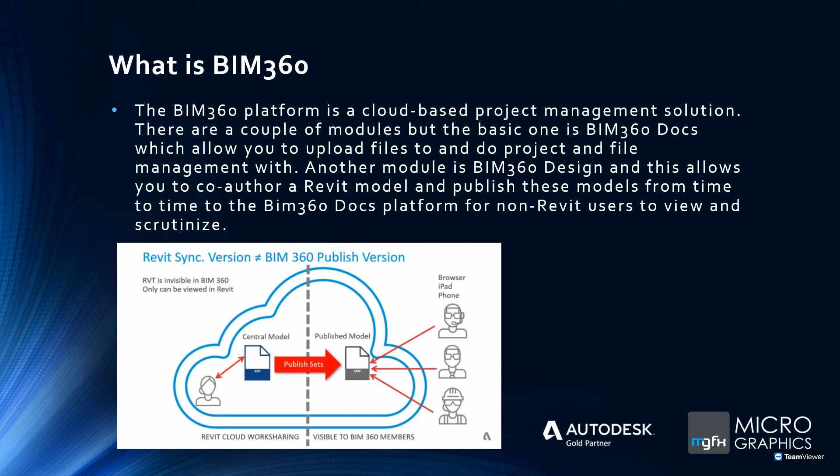And this is where the virtual meeting basically would occur. There are different other modules behind and for BIM360, also construction modules that take this further, but for now I'm just going to focus on those two ideas: the co-authoring of Revit on the left-hand side, which then gets published to the right-hand side for non-Revit users to look at the model.

Okay, so just a little bit on what virtual reality is and the hardware required. We'll talk about the hardware in depth just now, but it's basically a headset or technology that you add to your visuals. You put it on your head, you look through it, and what you see is the model that you've designed in Revit.

If you turn your head, you basically see the inside of the building, and you can use these controllers to teleport to different areas of the model. Some of these apps also have menus, so that when you select various buttons on these controllers, you would access these menus and then do certain things. But the idea behind virtual reality is you are immersively inside the environment.

Now, it could be games, it could be, in this case, the building, and it's a growing and more popular platform to meet and play games and whatever with.

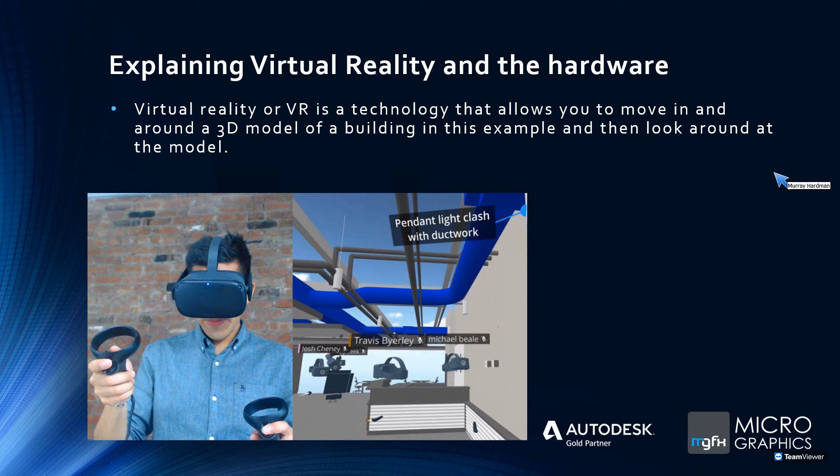So there are many players in this market producing and providing hardware. I think PlayStation has also got a VR headset that you play games with. There's Oculus, as the little picture shows. There's HTC as well, there's Windows headsets and various other headsets, and it's progressed very well in the last couple of years.

The first kind of versions were tethered, as they call it, to a PC, so you needed the PC to do any processing of the visuals that you see, and you were linked to the PC with a cable.

Nowadays, the kind of version 2, or the 2.0, isn't tethered to a PC. It's got its own processors built in, and it's got Wi-Fi, so it links to your routers directly, and you upload and download the apps on the actual headset.

There are obviously various makes, and you can get them from your IT store, even from us. Okay, so that's the equipment that you would require to meet virtually inside this kind of idea.

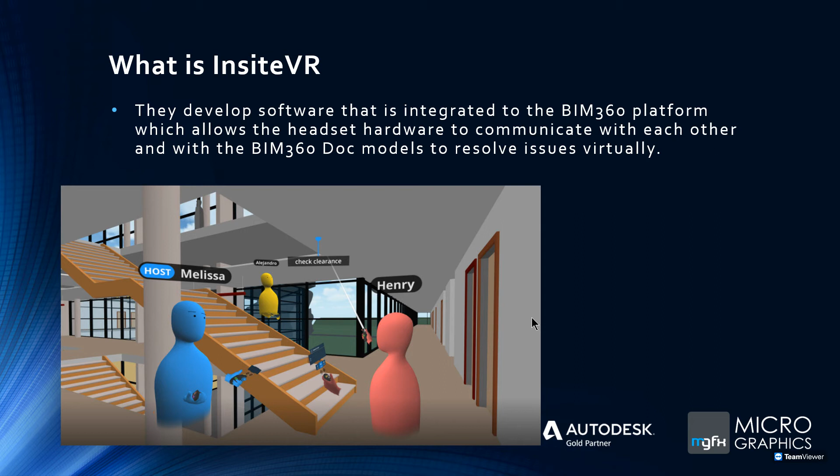If I go to the next slide, you'll see how you get into this particular mode. You'll go to your website, log into your BIM360 platform, see the project, get into the project, and maybe invite other people. Then, once you've installed this Insite plugin integration, you'll see additional buttons on your interface.

It's basically one button that you press, it kicks in the software, you put your headset on, and you're inside that building. Then other people can join too. So it's not a very technical way of getting into this area—it's simply logging into the platform, clicking the VR button provided by the Insite app, and then you're there.

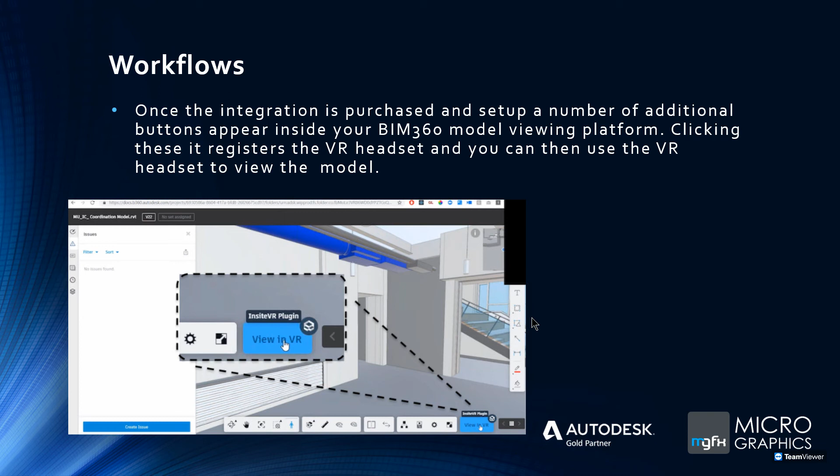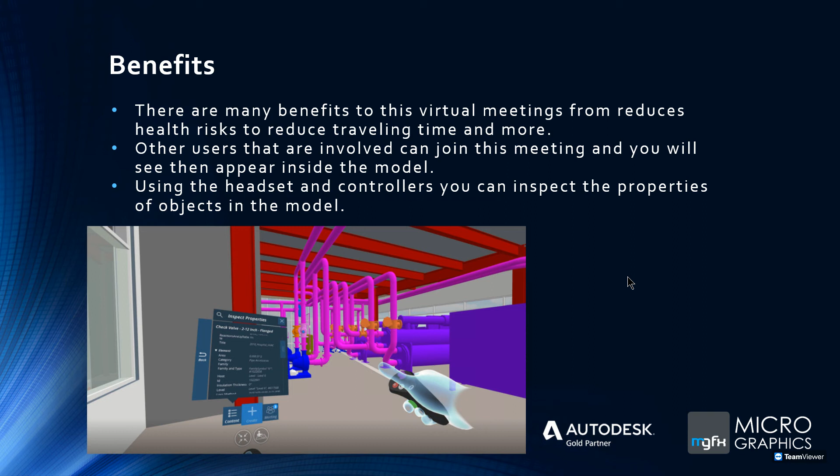Now, a couple of benefits to this. With these controllers, there are various menus. One benefit is you can see the information, check where clashes are, and also discuss the model. You can measure using the tools within the controllers, and there are little menus that you can access to look at the properties of each component—their sizes, lengths, systems within them, etc. So you can inspect the properties of these models using the menus and measurement tools.

An additional benefit that's very handy is you can sketch on the 3D virtual environment. You'll see in the middle of that picture there are little arrows you can sketch with. All these annotations get processed and saved in your BIM360 platform so that you can assign them to subcontractors or particular people as issues.

What's also awesome with this system is it's got a speech-to-text tool, meaning that since you've got your headset on, you can't type on a keyboard or see the keys. So you use the little controllers to go to a tag or create an issue, then speak, and it's kind of a recognition system which transfers your voice to text, placing this little tag on the object as a text note. This gets transferred into the BIM360 Docs platform as an issue, which can then be assigned to someone to fix, perhaps if it's a clash or a problem you've now recognized within this 3D model.

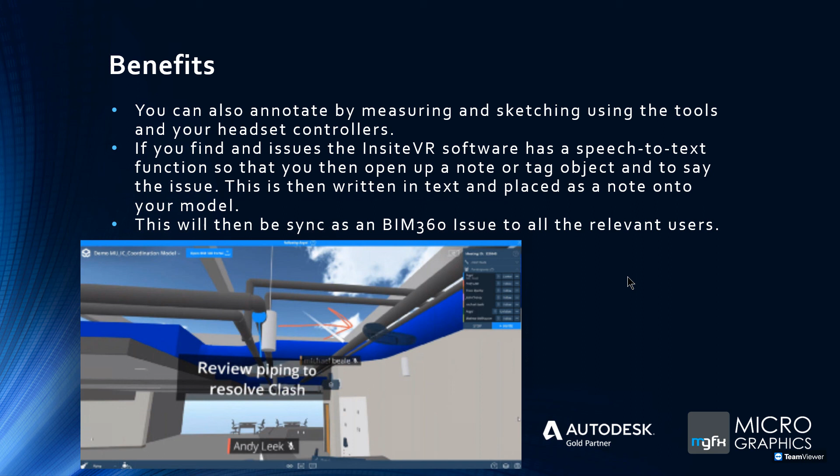This allows you to inspect and create a workflow virtually, without actually meeting people or going on site to see issues—because if it's already built, then it's too late. So, lots of benefits.

The main benefit, I think, now with the idea of us working from home—lots of virtual things happening, webinars, email meetings, Zoom meetings—I think this is just an extension of that, and it could benefit a lot of people without traveling, without the health risks involved in going and meeting people. By using these tools successfully, you can produce better results, faster, resolving issues using the BIM360 platform, Insite or Resolve BIM, and of course Revit to author the software.

So this is just one integration—there are many others. In this particular discussion, the idea I wanted to get across is about virtual meetings and how they can be accomplished.